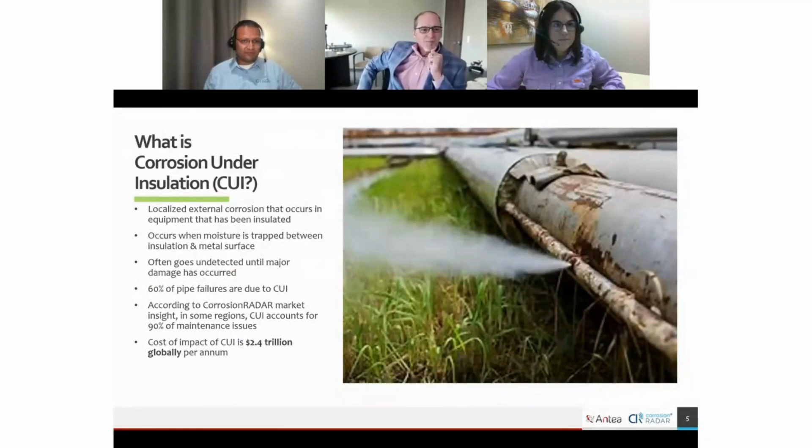Excellent. Next slide. So let's talk about the challenges that we're looking to solve here. We're trying to improve our ability to plan inspections as it relates to CUI. So basically, if you have sensors that can detect the conditions that promote CUI, then you can focus your inspections and your maintenance dollars where it creates the most value, where you see those conditions are higher risk for CUI to exist. So it really helps you focus your maintenance dollars on where it's going to add the most value versus just stripping all insulation, or using other technologies that maybe are not quite as accurate.

What do you think, Prafull? Absolutely, and as you said, that's on the inspection side of things. And when it comes to corrosion management and integrity management, can we be predictive? There's a whole lot of work going on in the industry about predictive tools, but they are based on assumptions as well. So can we have predictive corrosion management? That's a huge opportunity for the industry. CUI is an example of that. We are seeing the initial applications of predictive corrosion management, which means you're not detecting too late, you're actually proactively managing the risk. So corrosion management has huge implications of technologies.

Yeah, for me, it's a lot more proactive means for CUI detection versus the current concepts of actually going out and looking for a needle in a haystack. Even when you use technology, that's not always very accurate. So yeah, to me, it just makes a whole lot more sense. It's a lot more feasible, a lot more cost effective. It's just a matter of timing of implementation.

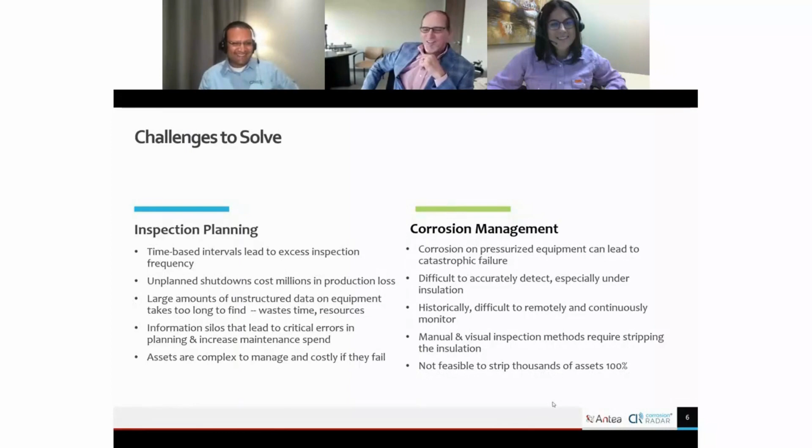So we all know that risk-based inspection is more or less a methodology where one can actually calculate risk and better understand not only where they should spend their maintenance dollars, but also what they need to do, right? So you're going to perform the RBI analysis based on API 580, 581 concepts, and you're going to calculate that risk looking for a specific damage mechanism.

Then you can create your inspection test plan focused on that specific damage mechanism, whether it's general thinning, cracking, or whatever the case may be. You can focus those maintenance dollars on the specific damage mechanisms that you're looking for. And this is how you mitigate that risk. You better understand, one, if it does exist, or two, that it doesn't. Either way, it's an end to that means. Slide.

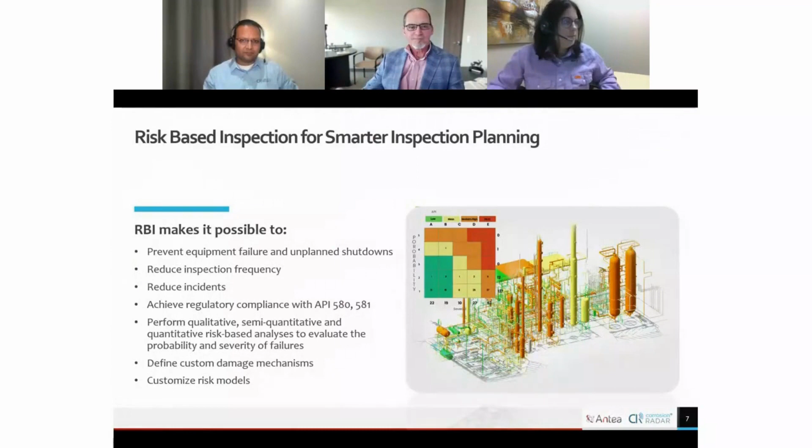So one of the ways that we like to look at it is through a digital twin. For me, this just becomes so much easier because I'm a really visual person. Prafull, I consume information so much better through visualizations. So the ability to look at that digital twin and better understand not only that there is risk in my plant, but where it's at in my plant, and then access all the information associated to that risk right through that digital twin. It's so much easier to consume that data through visualizations versus tabulations.

Tabulations, back in the day when I was younger, that was great. I could sift through Lotus or Excel spreadsheets all day long. I just dated myself, didn't I? Lotus isn't even a thing anymore. So I could sift through them all day long and glean a lot of information from that. But now I just don't have the attention span for it.

I read a couple of years ago, around the COVID lockdown timeframe, where I believe it was Microsoft, or it could have been Google, saying that humans have the attention span of a goldfish, about 8 seconds long. So this is why visualizations tend to capture attention more, and people consume the information from that visualization so much easier.

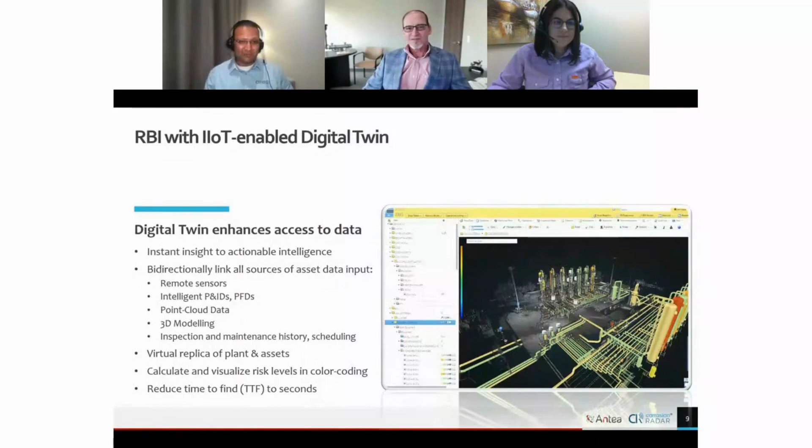So types of corrosion data captured. We know we always capture our NDT data, so kind of humans as a sensor, if you will. Technicians, inspectors going out in the field and gathering, whether it be ultrasonic thickness data, phased array, radiography, whatever kind of data they're capturing, and bringing it into a platform so that you can actually analyze it and manage it. The other part of that is ensuring that your corrosion probes and coupons programs are all connected also, because this is all corrosion and damage data that you want to be able to monitor in a platform.

Lab analysis. I know this sounds a little bit off task for asset integrity, but the process affects metallurgy, right? Process, not only the constituents that make it up, but also the pressures and temperatures it runs at. Everything can change the pressure envelope in some way, shape, or form at some level.

So also remote sensors. We know we can capture data either from remote sensors directly or from PI data from data historians, DCS, PLC. All this sensor data is really valuable. Now, here's where it really gets interesting, where you actually connect this to the CorrosionRADAR platform and are able to access that sensor data to better understand, track and monitor the conditions that promote corrosion under insulation right there in your digital twin. This to me is really interesting.

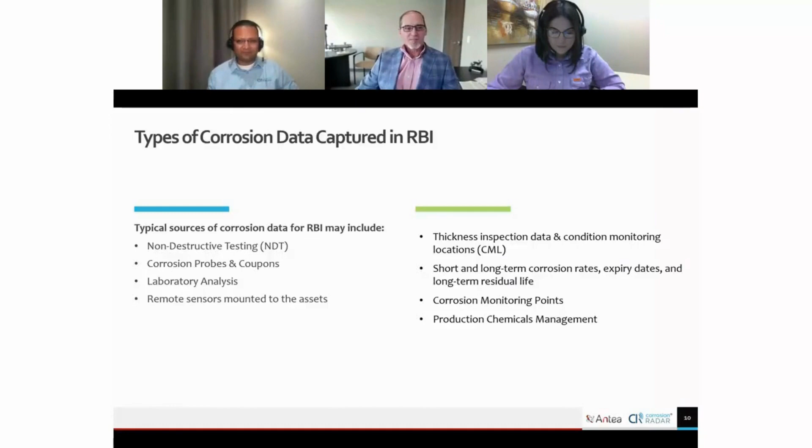All right, so now we talked about CUI, we talked about RBI, we also talked about digital twin and the opportunities lying ahead, humanization, Sherlock Holmes. How do we do this? So how do we achieve continuous CUI monitoring? Now we have seen CUI to be inspection oriented, lagging indicators based, visual inspections. But now is a technology which I'm talking about, which monitors a few parameters which are leading indicator parameters for CUI. So jump into technology. Next slide, please.

So in the CUI space, the core problem is when and where risk is going to happen, much in advance. So suppose CUI has not yet happened. Probably these are newish pipelines or older pipelines, not even pipelines, some assets, pressure vessels. The core question is where it's going to happen. So because of that, CorrosionRADAR have invented a technology which is a long-range sensor technology. So it gets installed. What you see on the screen, the orange colors are basically wire type sensors which are about 100 meters long at a time, connect to a data logger, the blue box here, and transmit the data wirelessly to software. It can be any software, data visualizations, and RBI software, Antea.

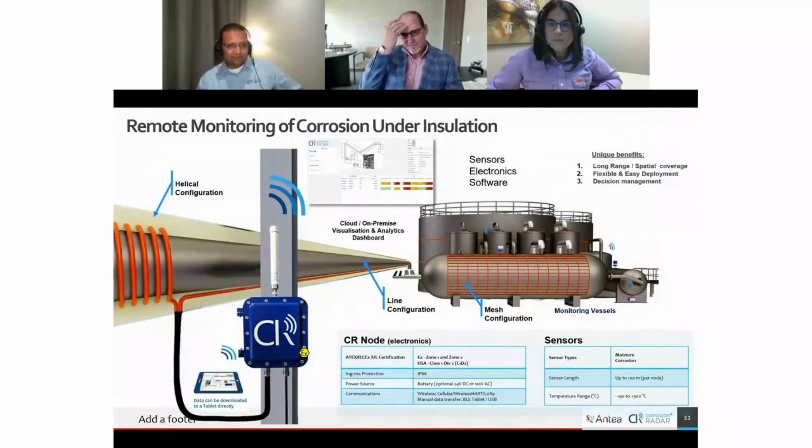And then all this data is combined and analyzed and put into risk tables and connected to the RBI matrices. So that's the language. Risk is the language, but the source of the data is moisture and corrosivity sensors. This device is widely available, ATEX rated or explosion proof rated, and I'll talk about some of the case studies. Next slide, please. Next slide.

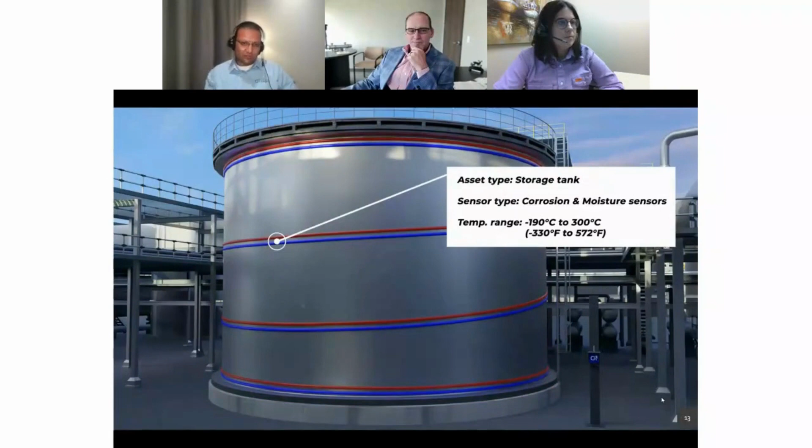So here's a video example of the digital twin aspects of how this affects. Obviously, the sensors can be used even without digital twins, but the enhancement is with digital twins. So this is an example of a tank. Both corrosion and moisture sensors are wrapped around, and they're sampling a wider area rather than a spot, and the data gets transmitted. And here you see that key locations are identified where the risk, in this case, is medium. So it's really localizing specific spots. In this case, you need not create scaffolding. You can just do rope access, save the cost, and really inspect where it needs to be done.

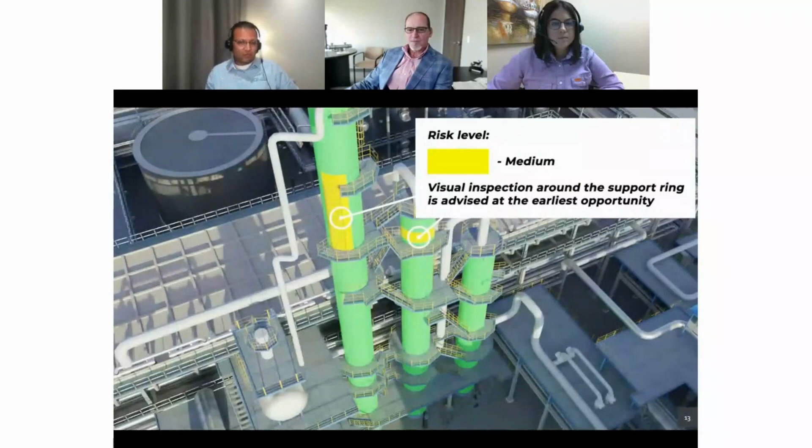Now, this is another example where it's a high tower, say 25, 30, 40 meters high, and normally scaffolding is needed to inspect the whole lot. But if we can pinpoint using sensors where the greens are and where the yellows or reds are, then we can be targeted in our inspections. We can be targeted in our scaffolding. In fact, we need not do scaffolding. We can do rope access. And that's on the scoping side, but also time-wise, if everything is green, then skip the inspection, or defer the inspection if there's a need. So it helps in the decision-making aspects.

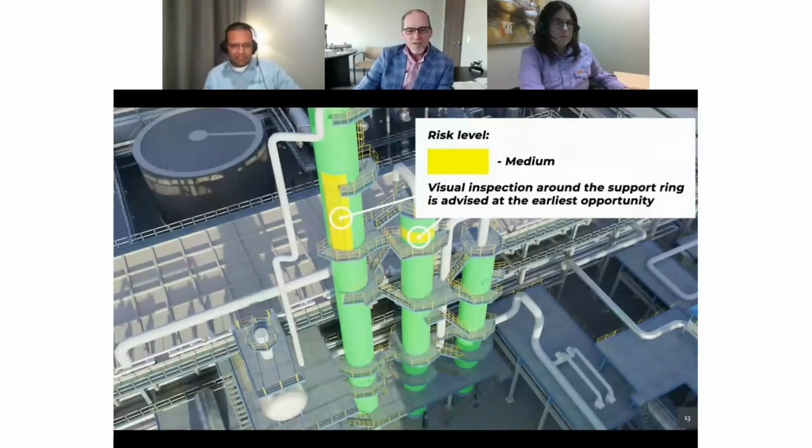I think the video is stopped. If you can see if we can play it again. Stopped. All right, so it's working.

Further on, there are, for example, the immediate threats, nozzles, protrusions, those are the spots. Now the sensors can be routed through those. And if we know in advance that those are the risky locations, others are green, others are yellow, those can be prioritized on the whole asset. So cost savings there, and safety as well.

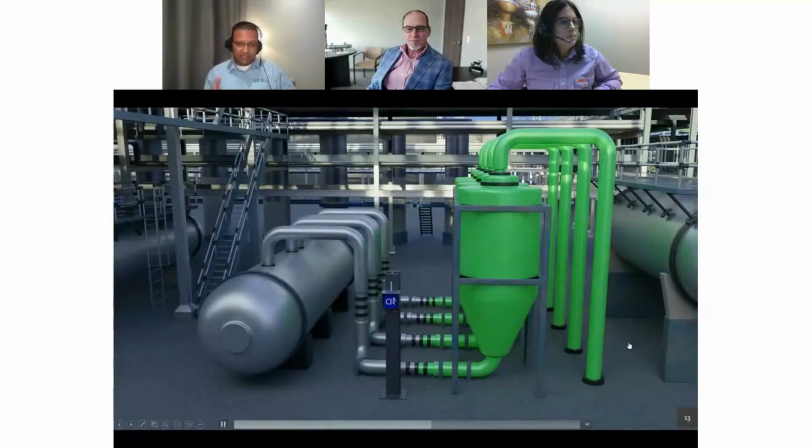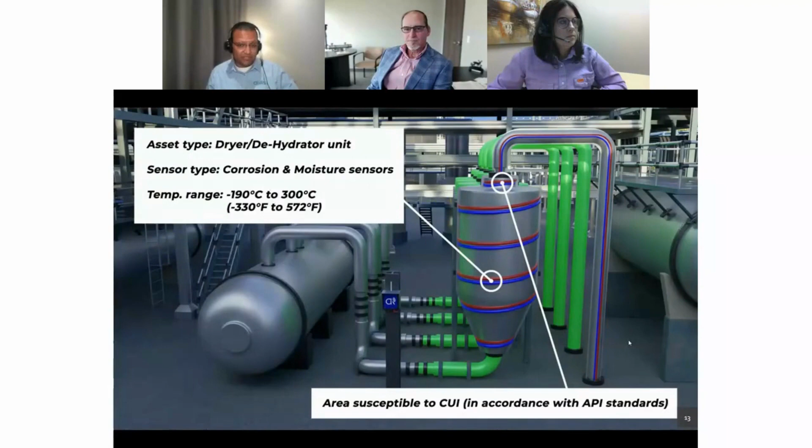Complex geometries like these are very difficult to categorize: is it a pressure vessel? Is it a pipeline? What kind of methodology do we have to apply? So we apply sensors in a complex fashion. It is designed that way, and once the sensor data is transmitted, it really tells when and where the risk is likely high. So in this case, top and bottom, but it can be anywhere as well.

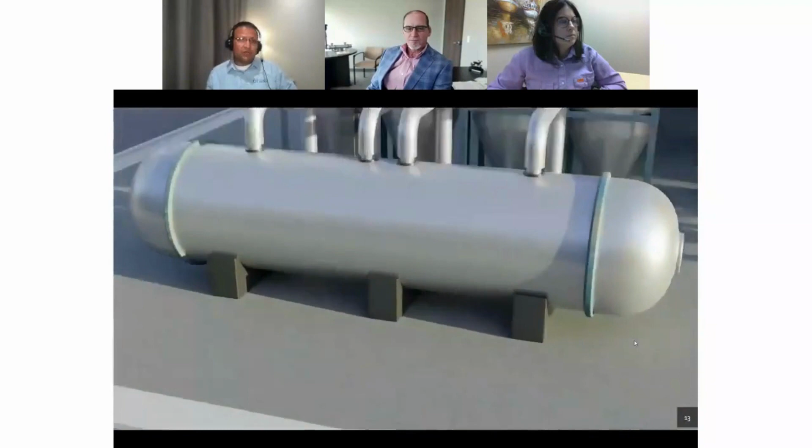Another example is a heat exchanger or a pressure vessel. In this case, the nozzles are priority inspection locations in the risk tables. But if the sensors are routed and they tell us that some of the locations are fine, but some of the locations are actually higher risk, this is about higher resolution of risk. Normally, this whole tank or vessel would be one risk, but now we are actually giving a high definition of risk using sensors. So you see only two locations were identified as risk, so other locations can be skipped in the inspections. So yeah, next slide. So that's the power of digital twin and monitoring technologies.

One of the key good applications are cold assets and cryogenic assets, which cannot be inspected in live conditions. So we need to understand the risk of those in live conditions, because you cannot inspect them. They form ice if you open up the insulation. So that's one of the primary applications as well. So yeah, various applications of different kinds globally.

Floyd, do you have any comment on the applications? Yeah, no, I agree. You can actually spread it across many different types of processes. It's just a matter of when you apply it. And again, you mentioned cryo services. Implementation would be during an outage or during new construction. Really, greenfield is the best place to install. But even when you're doing a CUI survey and you're stripping a lot of insulation anyway, the opportunity is there to go ahead and install the sensors.